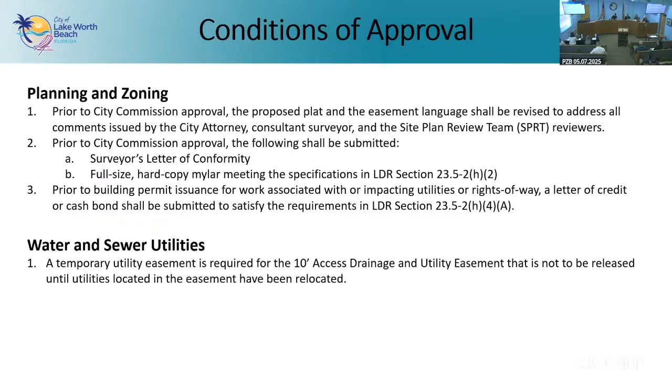We're seeing the applicant on Zoom tonight, but if you all have any questions.

I'm really glad that they incorporated that lot. That was one of the things we talked about when we approved the plat the first time around, and they just weren't able to, so I think it's way better than having a random lot.

I know we already talked way back about the dedication. They got the dedication of the alleyway. This plat looks like they also got a dedication of part of 9th Avenue. Is that correct? Correct, that was in the original approval session back in 2023, abandonment of 9th Avenue South, so they got, I believe, half of that right of way.

And is 9th Avenue South not going to be maintained as a roadway anymore? I believe it was not previously an active roadway. They abandoned the north half of it, but I don't think I have much of an aerial image. That north half of 9th Avenue South was part of the original planned development process. I believe it was not actually an improved roadway at the time, so we aren't losing an active road.

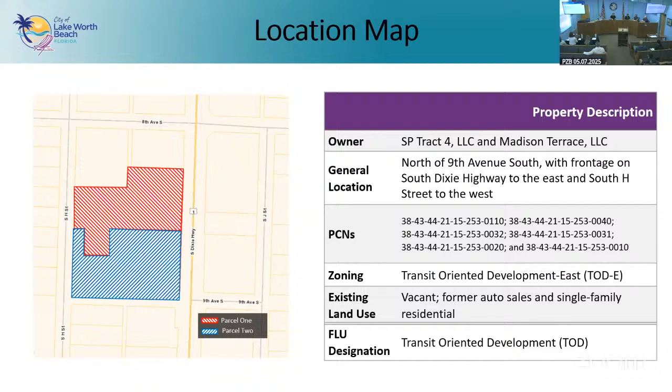My only concern is that this was approved a little bit outside the zoning rules for being a 6-story building, and that got a pass because of the nature of it. I just don't know what future development, what people may say if they look at it. They were able to get to 6 stories, not through Live Local actually, I think this was a little too early to be Live Local at the time. They were able to stack, as a planned development, incentives for the sustainable bonus and then the transfer of development rights program, and that stacking is how they got to 6.

I'm saying it does set a precedent, at some point or another. But I just want to make sure it's clear it was completely within the zoning rules and not outside them, that they got their pass. Not everyone will be able to stack in the way they were able to stack to get to that height, but our code does allow for that increase of intensity.

I also drove around there today, up around 9th Avenue. So what you're saying is there will not be a 9th Avenue anymore? The building is, it will not be a through street or avenue, what are you calling 9th Avenue now? So a section of 9th Avenue South adjacent to this property was abandoned. The entirety of 9th Avenue South throughout the city was not abandoned. Yeah, but this is that section that's going to be abandoned. Correct, yes, a north section of that bit of 9th Avenue South was abandoned and is now going to be part of this parcel and development.

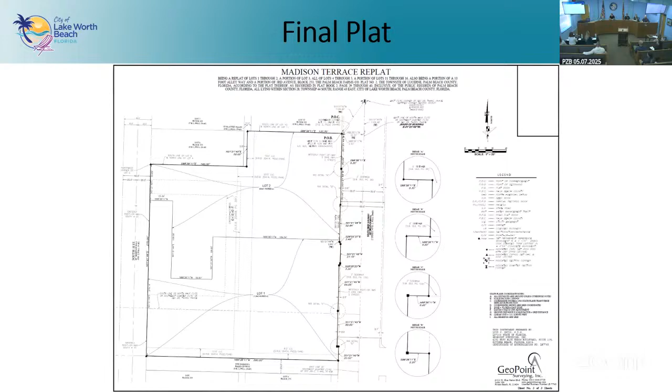Before you go, I just want to remind board members that if you go by the site and do site investigations, that is considered something you need to disclose for your board disclosures. So has anyone else gone by and visited the site? I live a block from it, I've driven through it. Okay, I just want to make sure, because if you just drive by there every day and notice it but haven't investigated the site, then that's fine. I just want to make sure we're clear.

I would move to recommend approval of PZB project number 25-011-00001, staff recommended conditions, for the final replat of the Madison Terrace project. The proposal meets the applicable criteria based on the data and analysis.

All in favor? Aye. I'm going to recuse myself for the next item.

Cotton, before you go, you need to put on the record what your conflict is. My conflict is my firm processed the request. Thank you.

Okay, so I think this needs to be marked number 4-015-00002.

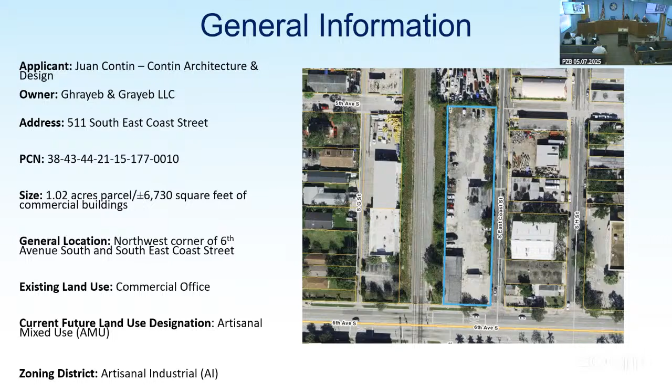The subject site is depicted on this aerial image. It is at the northwest corner of 6th Avenue South and South East Coast Street. The parcel is a little over an acre. There are 2 structures on the site that were built in 1935.

This year, the applicant requested to apply for a variance, requesting to place 6-foot tall fencing 3.5 feet from the front property line, where fence regulations require that fencing be set back to the minimum building setback line on the front of the lot for traffic vision purposes. For this zoning district, it has a minimum 10-foot front setback.

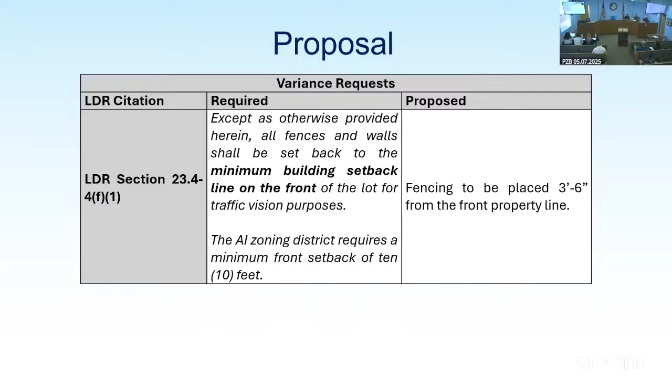Here's an enlarged image of the proposed site plan. Most of the existing site already has perimeter fencing, except the south portion of the property. So in our analysis, we found that the proposal actually meets all 4 of the variance criteria.

The applicant is proposing to fence in this site completely for security purposes. Right now on the south side, one of the existing buildings is currently located about 1 foot from the front property line, so it already encroaches into the minimum setback requirement.

On the east side of the building, they have an existing landscape buffer, and there is an entrance door. So if the applicant were to follow the fence requirements of setting the fence back to the minimum 10-foot setback requirement, it may negatively affect the circulation of the site.

Anyone who would drive into the site and park would have to park internally, walk outside of the property, then walk back in to enter one of the doors. It would affect the site circulation as well.

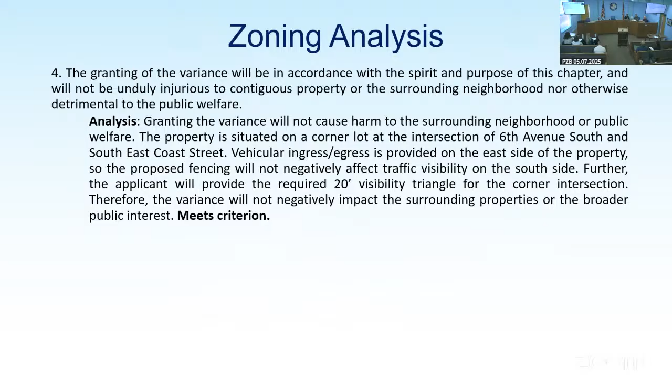Based on our staff analysis, we found that the proposal meets all of the variance criteria, including the special circumstances of the property, and that strict application of the LDRs would deprive the property owners of reasonable use of the land.

So we are recommending that the Planning and Zoning Board approve the proposed variance with the following condition of approval: that a minor site plan and building permit is still required for the proposed fencing, which is a typical condition for new fencing on commercial properties.

I have motions here, and I have some photos of the property and the full site plan if you want to see that.

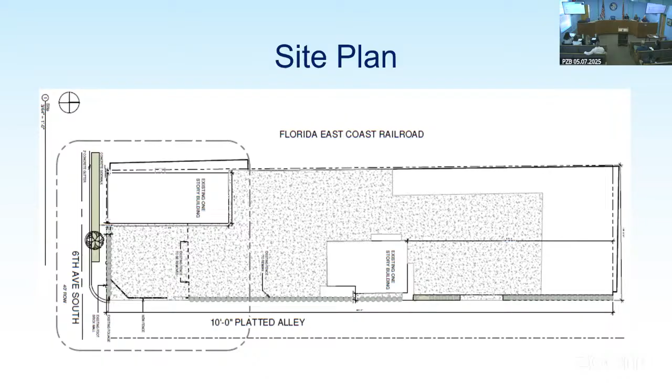I would suggest that we take questions for staff first, and then let the applicant do their presentation. The only thing I want to make sure is that the line of sight is all right with the new fence. Yes, they do depict that on the proposal. By code, they're required a 20-foot visibility triangle, so they will be maintaining that.

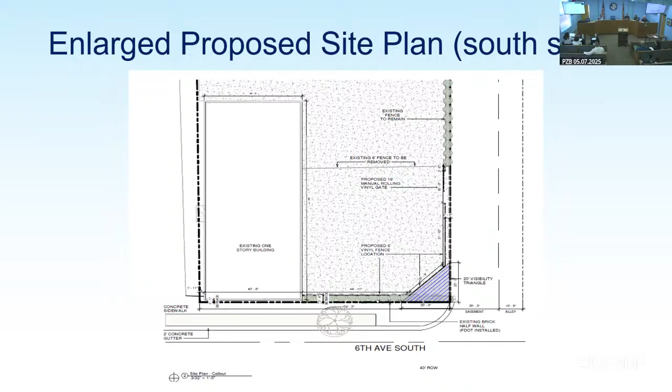I also noted that the motion doesn't state that it will actually be 3.6 feet. Back to the motion: it's to allow fencing to encroach in the minimum front setback. So are you saying you prefer if it specified the exact encroachment in the motion?

It's now asking the fence to be within 3.6 feet of the property. What I'm saying is, in the motion, shouldn't that be stated, the actual amount that's approved for the variance request, since it's going to be 3.6 feet and not 10 feet? I'm just asking. Yes, you can provide that in the motion to specifically say that it allows fencing to be 3.6 feet from the front property line.

Any other questions of staff? Is the applicant here? Would you like to speak?

Good evening. My name is Marcia, and our client has come to us for this issue, applying for the variance due to the fact that he was concerned for the issue of having security.